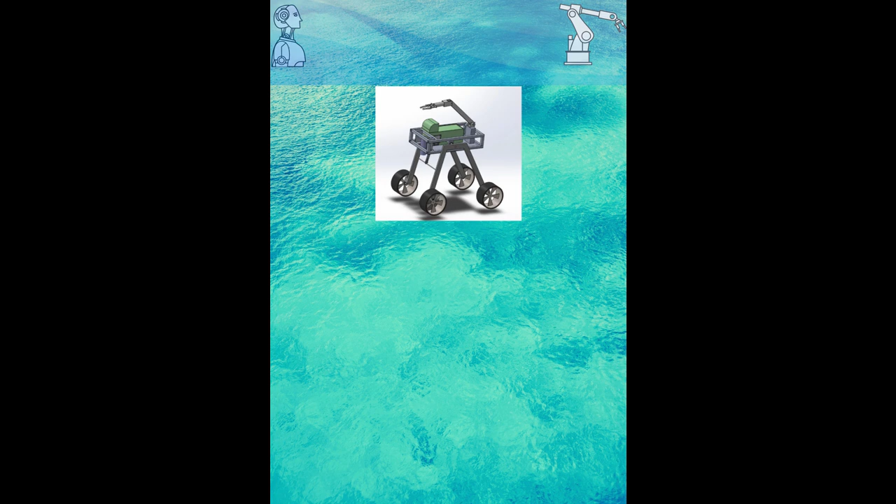We are here to explain the household bot. All the members of our team are from SRM Institute of Science and Technology, Kattankulathur. I am Vedant Anand, first year student in BTech Mechatronics, specialization in robotics. And I am Devjani Guhabiswas, first year BTech student from ECE, Electronics and Communication Engineering.

The initial task that we need to overcome is that our kitchen box, which has a mechanism for chopping different types of vegetables, needs to ensure that it can chop all different kinds of vegetables and fruits irrespective of their sizes, and it should allow us for an easy collection of these chopped vegetables and fruits. It should provide us with a mechanism which is easily mounted and is portable so that it can be used anywhere.

Exterior bot: an exterior design which can contain the interior kitchen box, a flexible arm to carry different kinds of household objects, vegetables and fruits, a specially designed gripper to open the drawer and keep objects, a stabilizing mechanism so that containers containing liquid do not spill, and a transport mechanism designed to climb stairs and provide stability to the chassis while crossing the obstacles.

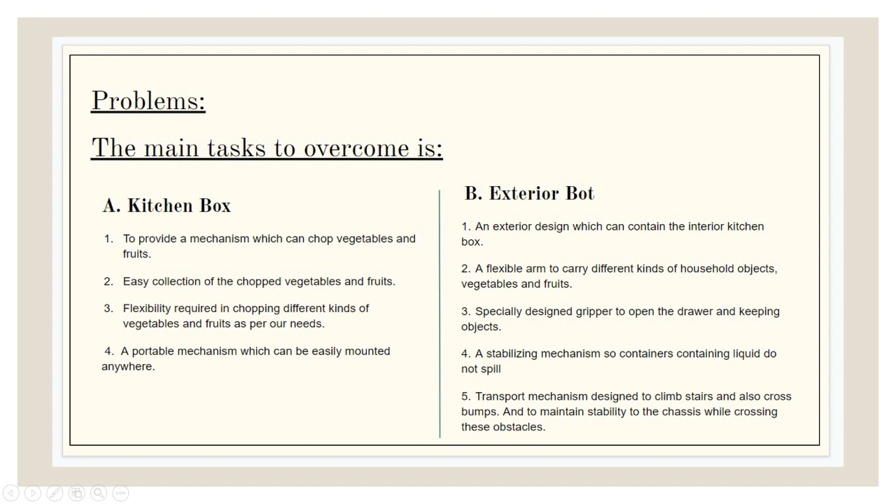To tackle the problems mentioned, we have devised an innovative system for cutting the vegetables and chopping them into the pieces we want. It can also be used for fruits as well. It's a portable system which can be taken anywhere, and at the same time be mounted easily on any object. We have devised an exterior configurational setup which will help to transport and do delivery of fruits, vegetables or any household items. Also, a stabilizing mechanism is used so that no liquids are spilled.

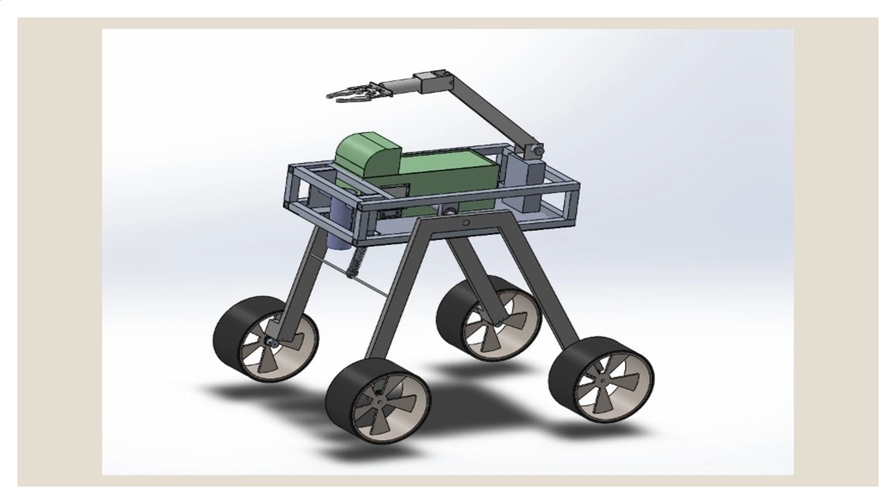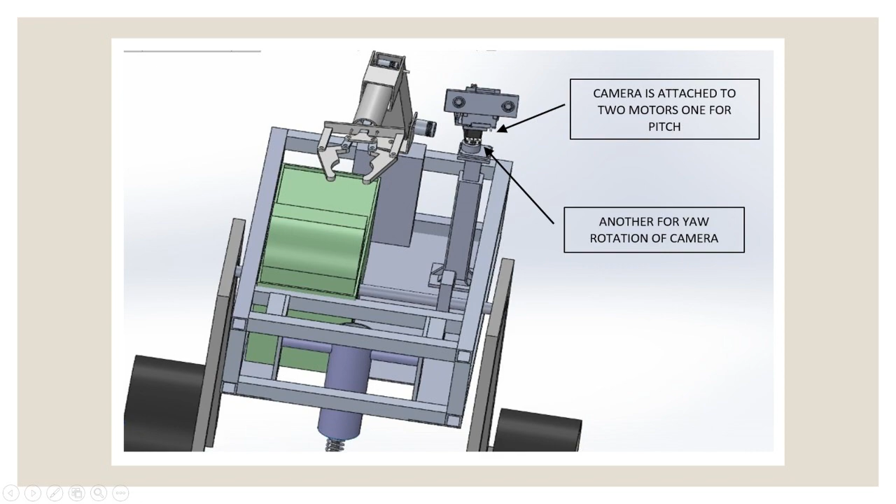This bot can be easily operated from rooms by using the camera installed on the bot. This becomes really useful for older people to fetch their medicines or water or any other item from different floors, and it can assist them in the kitchen as well. Now moving to its working mechanism.

The vegetable cutting mechanism consists of two linear actuators, one to push the vegetable inside and another to operate the blade. It has two blades, one for cutting vegetables in different shapes and another for chopping the vegetable. There is one servo motor to move blade one, and two boxes, one to contain the vegetable and another small box to hold the chopped vegetables. One drawer slide is attached to the bottom of the small box so that the box can be easily pulled in and out. Now moving to its mechanism.

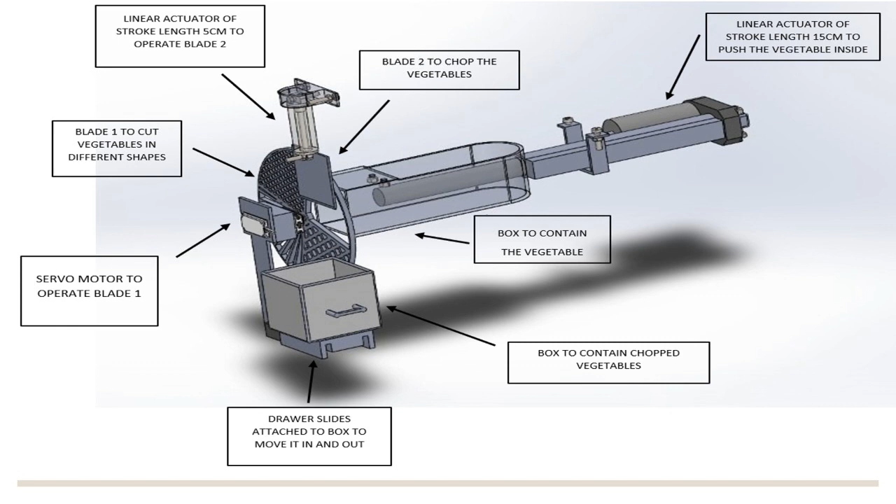In this vegetable cutting machine, we can see there is a filter blade which can be used to select the sizes of the pieces we want. The linear actuator then pushes the vegetable, be it cucumber, carrot or anything else, through this blade, which shreds it into pieces that get collected in this box, which will later come out and we can collect the vegetables.

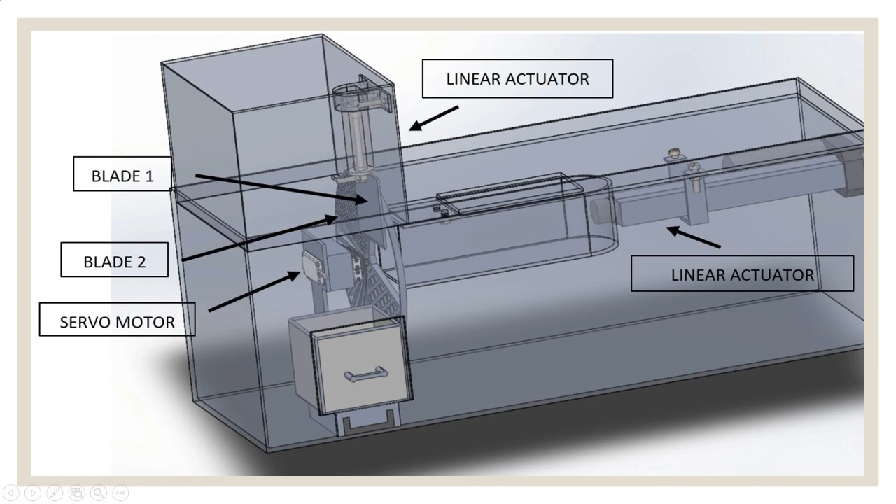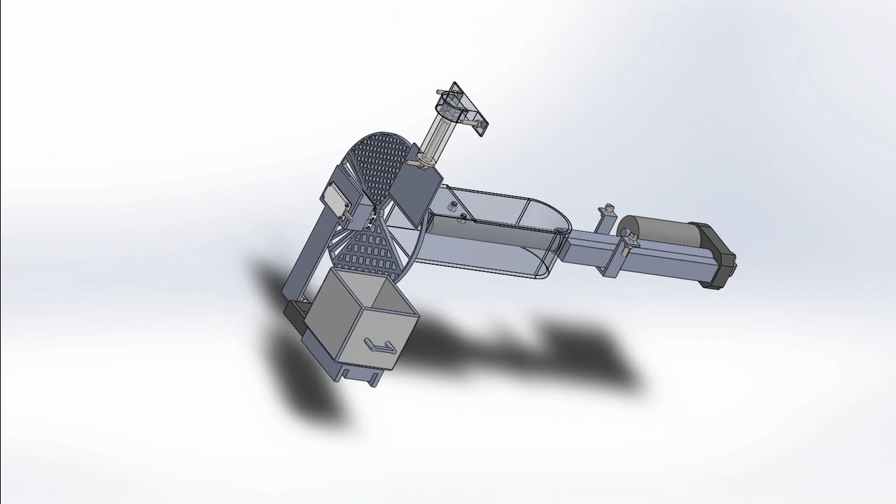Talking of blade 2, the linear actuator pushes the vegetable towards blade 2 and the smaller linear actuator gives the blade a vertical to and fro motion, and the vegetable gets chopped. These two blades, blade 1 and 2, can be used together to get desired cut pieces of the vegetable. This whole vegetable cutting mechanism is then covered by an aluminium sheet metal box which is then attached to the chassis.

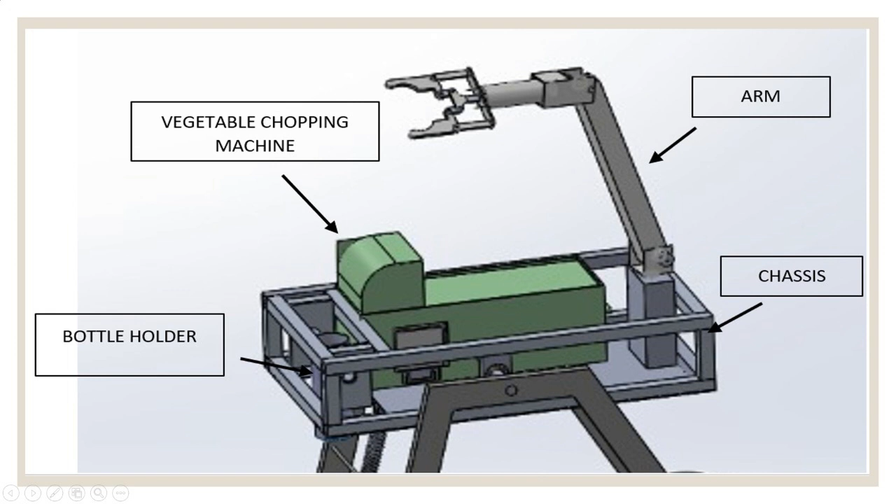The vegetable chopping machine is made in such a way that we can easily attach it to the chassis or any other device for that matter. The drawer is aligned just in front of the arm so that we can use the gripper, which is designed to carry vegetables, bottles and other household items. The tip of this gripper can be used to grab the handle of the drawer, which is then pulled to collect the chopped vegetables, and in a similar manner the drawer can be closed.

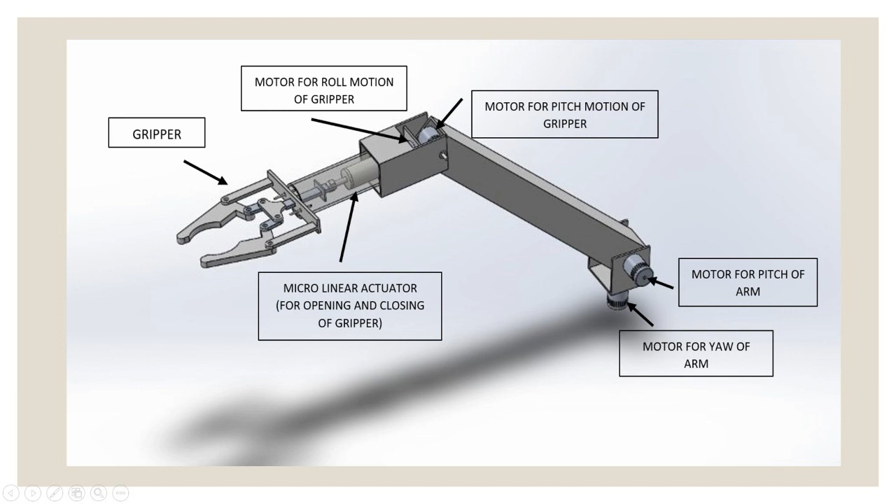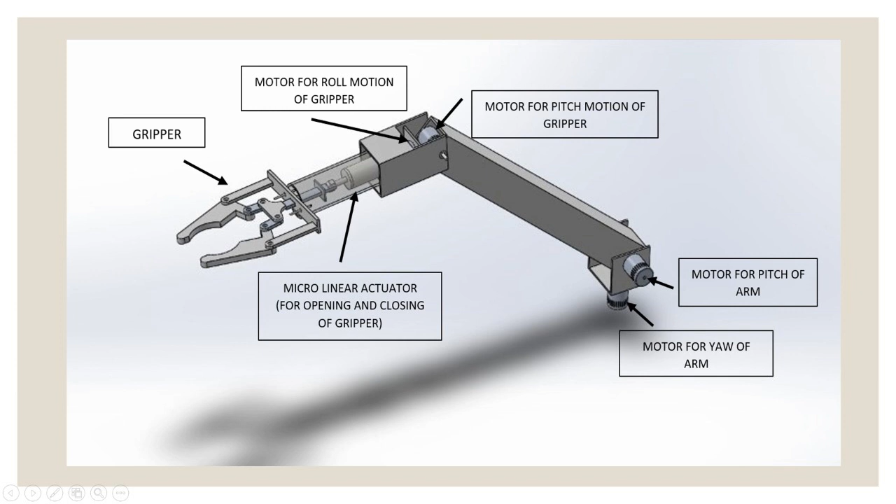A robotic arm is specially designed with two motors at its arm base so that it can control its yaw and pitch. There is another set of two motors attached to the link, which again give pitch motion as well as rotational motion. And an actuator is placed along with the gripper to give the grabbing mechanism. The gripper frame contains a symmetric distribution which allows actuation using a linear actuator for the grabbing mechanism.

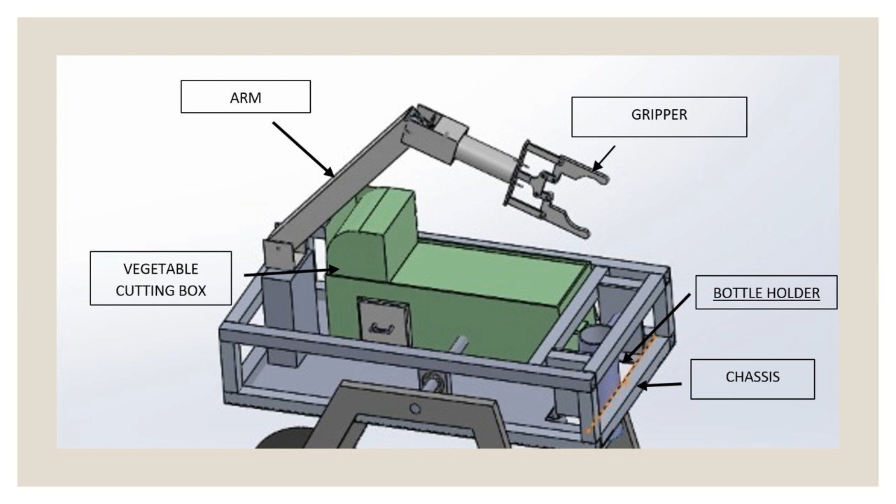A bottle holder is attached in front of the vegetable cutting machine to carry bottles. It is made of aluminum sheet and is attached to the chassis in such a way that a no-spill condition is created. Two rods are attached to the holder, which is attached to the chassis with ball bearings, so that when the robot crosses any obstacle or climbs stairs, the bottle holder aligns itself with gravity and the liquid in the bottle does not spill. The placement of the bottle holder in the chassis is such that the gripper can easily place the bottle in it.

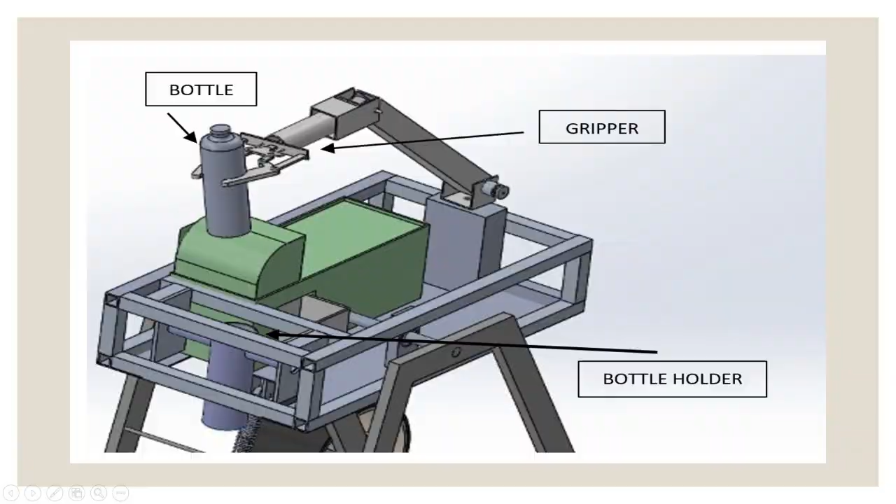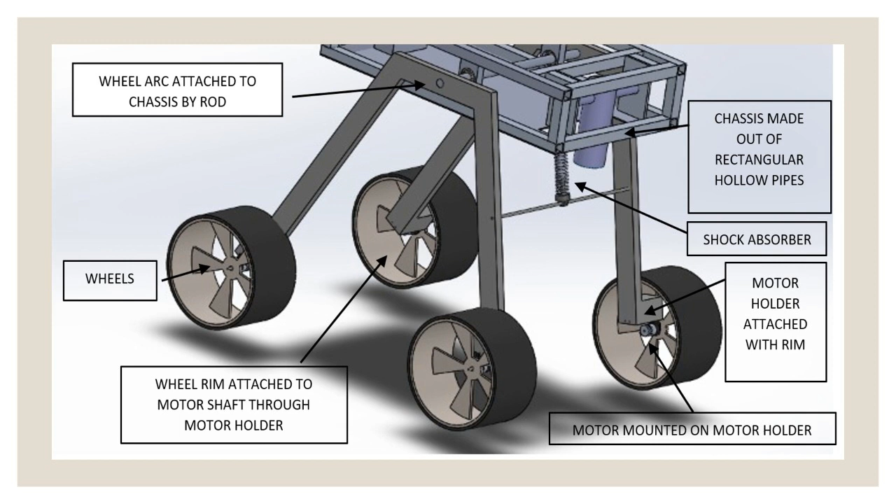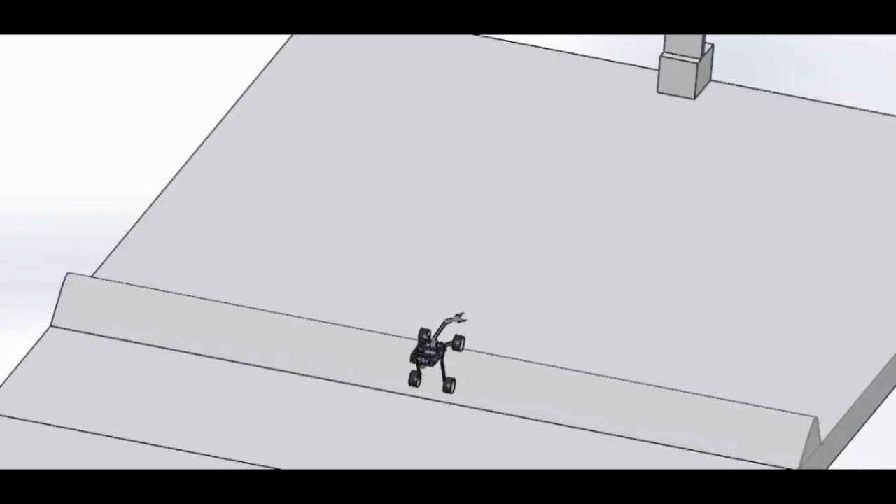The transport mechanism contains double arc systems which are attached to each other, allowing angle deviations of up to 45 degrees. There is another structure attached in the front part of the arc, connected by the shock absorber to the chassis for balancing the chassis. This transport mechanism enables the robot to cross any bump or obstacle in its path. It can easily descend or ascend stairs of height 20 cm with minimum jerk.

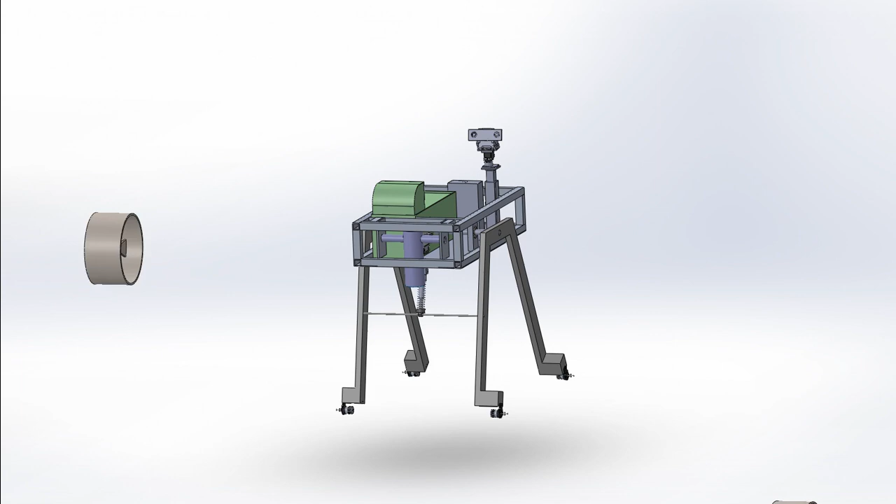The price of the entire kitchen box can be brought down to 10,000 rupees, and the rechargeable batteries help with repeated use of the system, which makes it a very good option for anyone to buy.